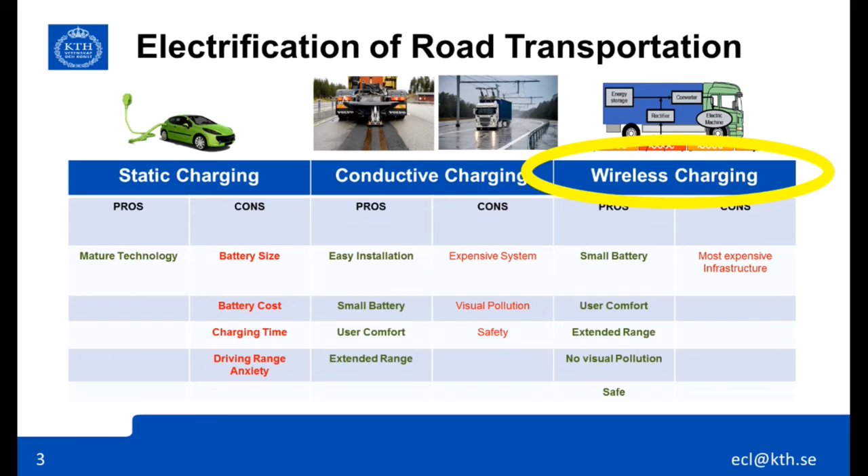So here are the pros and the cons of the different solutions. The introduction of the static solution has been really slow in the market because of the shortcomings that have been proven. So right now we're focusing on the dynamic, especially the wireless solution, because even though it's a really expensive investment, it seems like it will be the better solution. This wireless charging solution for highways, the inductive power transfer systems, is the better system because it is more powerful and more tolerant to misalignments.

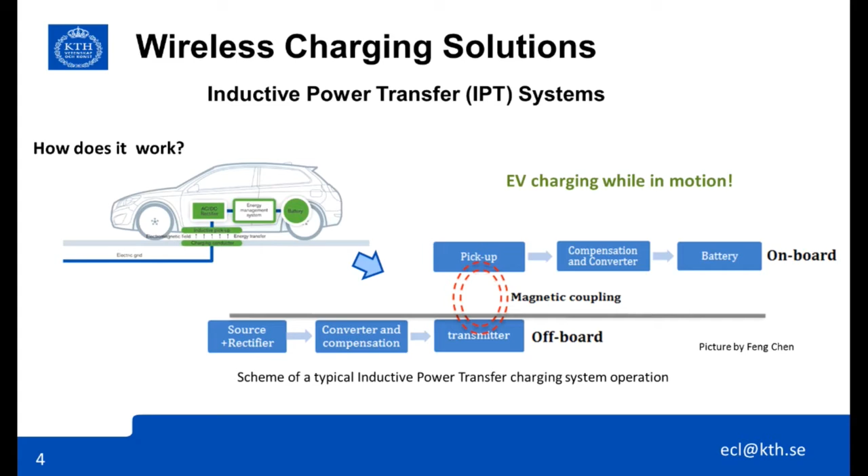And how does this work? Basically it consists of two devices: the onboard device installed in the bottom of the vehicle, and the off-board device embedded in the pavement and connected to the grid supply. Through a magnetic coupling, we can recharge the batteries of the vehicles while they are driving. And the whole implementation process is a challenge. The challenge is how to integrate this system in a feasible and sustainable way.

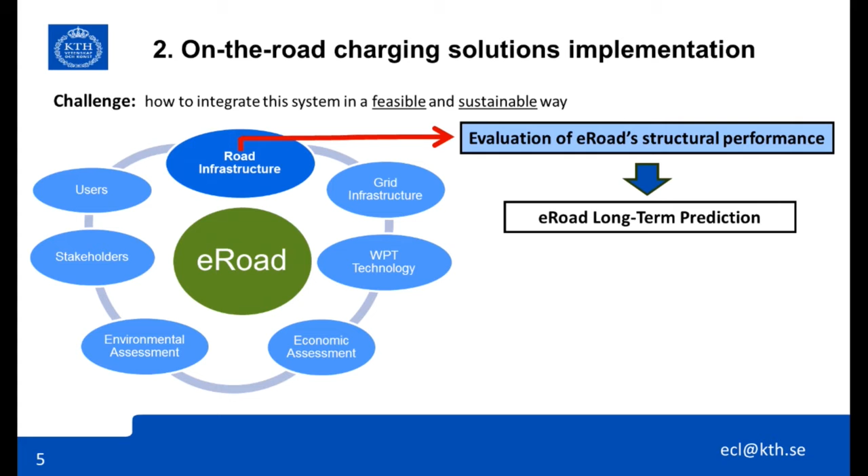These are just some of the factors involved in this process, like the requirements of the users, the different stakeholders, industry, governments, etc., the economic and environmental issues, the development and improvement of these wireless technologies, the design and construction of the grid infrastructure, and of course the development of the road infrastructure. I'm focused on the evaluation of the e-roads structural performance to get a little closer to the long-term prediction of this infrastructure.

Why the long-term prediction? Because in the whole cycle of the implementation process, the design stage will be really important due to the lack of experience in the construction of these kinds of roads. So the long-term performance, together with the social, environmental and economic issues, will lead us to the sustainable and feasible integration that I was talking about before.

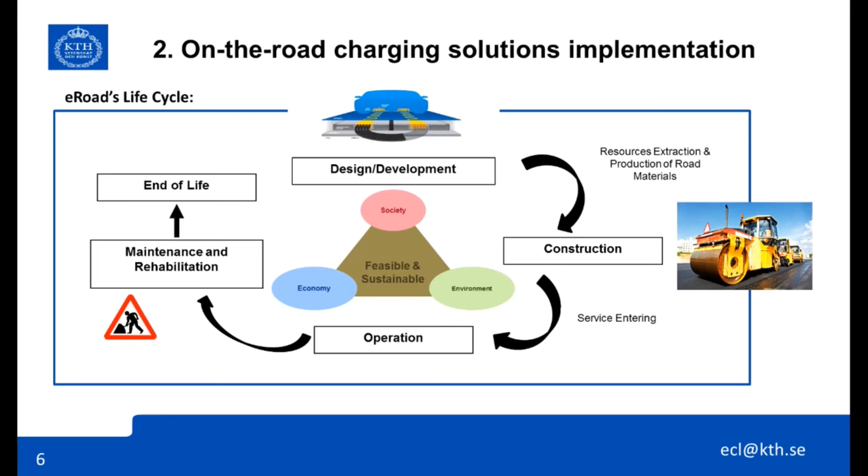So this is the framework, the big picture of my research. For the e-road structural design, to build a good solution for the future, we will characterize this structure by experimental tests, material characterization and validation, and computational modeling with different input parameters to make different configurations and try to find the best one.

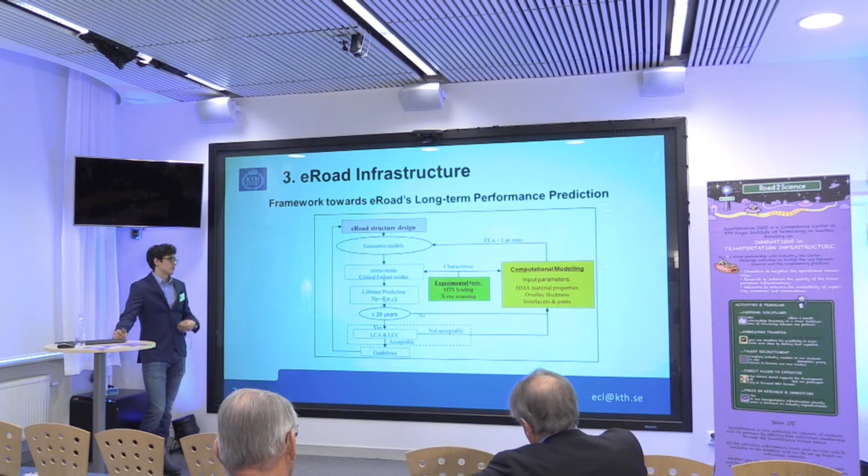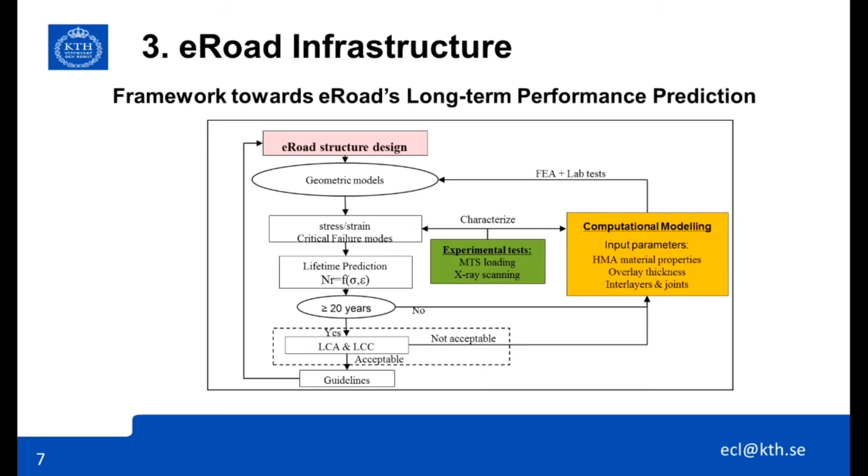We can obtain different failure criteria and modes from here, which will give us a broad estimation of the prediction of this structure. Then we can use these inputs for decision-making tools like life cycle cost analysis or life cycle assessment, and maybe write some guidelines for future construction and maintenance.

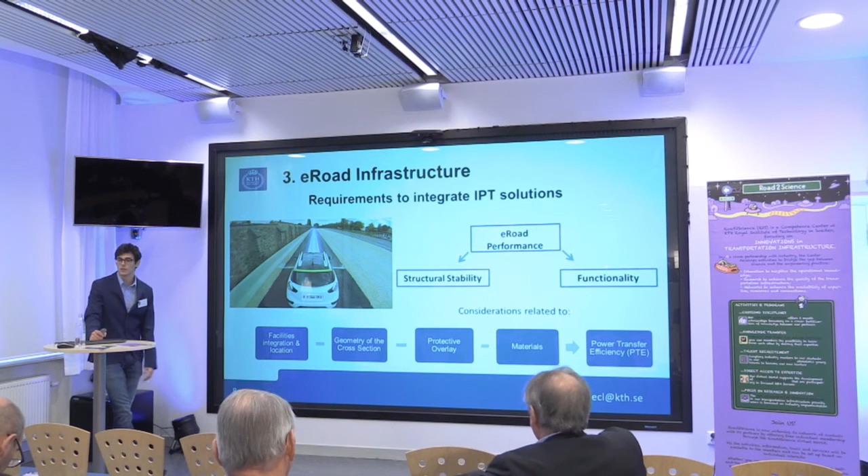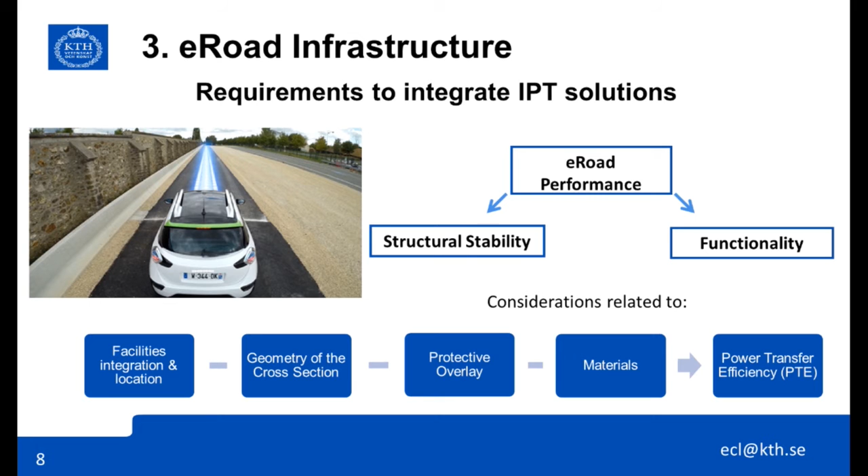Before everything, we need to know the requirements to integrate these inductive power transfer solutions in the pavement. The e-road performance is based not just on structural stability, but also on functionality. We have to combine these two issues. Some considerations are how and where to integrate these facilities, what the geometry of the pavement will be, the protective overlay, and which materials. All these considerations have to take care at the same time of the power transfer efficiency between the vehicle and the pavement.

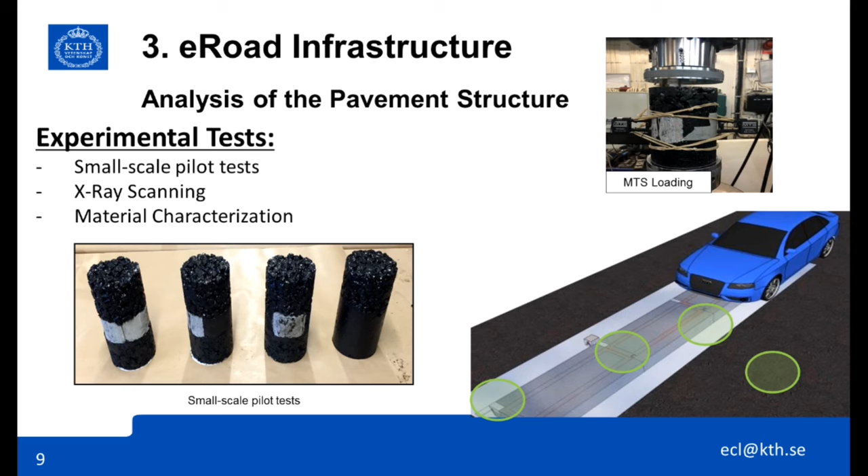Right now we have conducted some small-scale pilot tests of different locations of the e-road infrastructure. The module containing these facilities we call the charging unit, and we evaluate four different locations, like the corners, the interface with the asphalt, the area where two consecutive charging units are merged, and we compare them with a conventional pavement to see where the critical areas are.

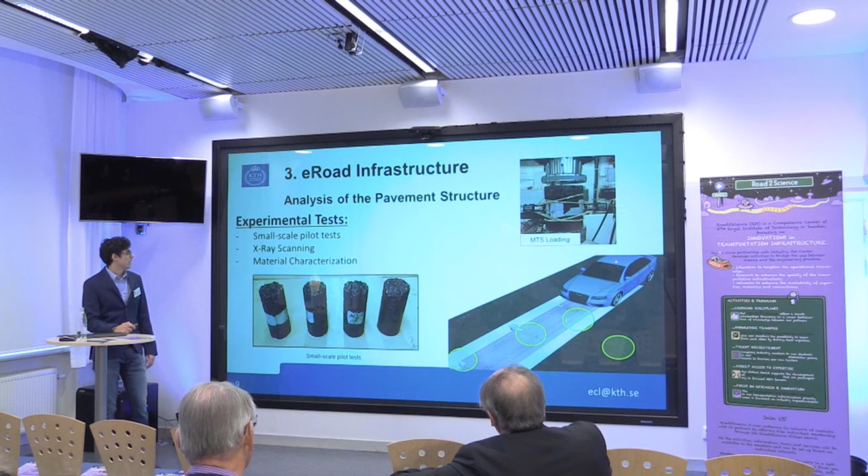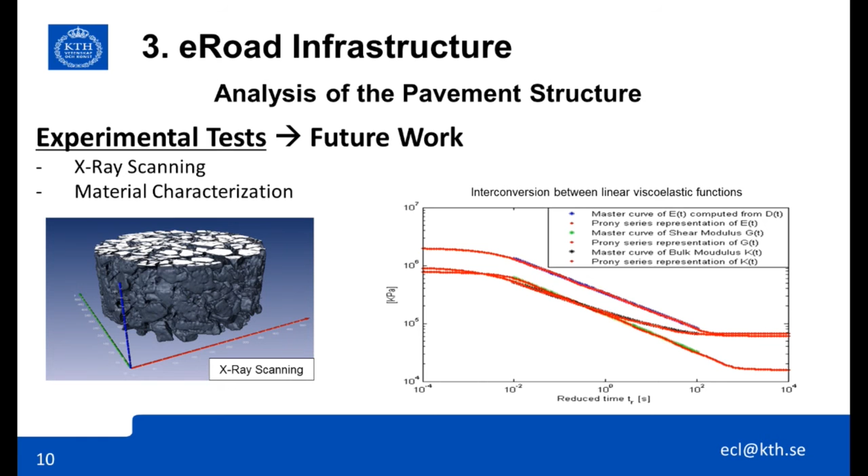For the future, we are planning to keep doing this small-scale e-road pilot test in different stages, and do X-ray scanning to evaluate the initiation and propagation of the cracks, and also material characterization to get deeper and more accurate characteristics of the materials.

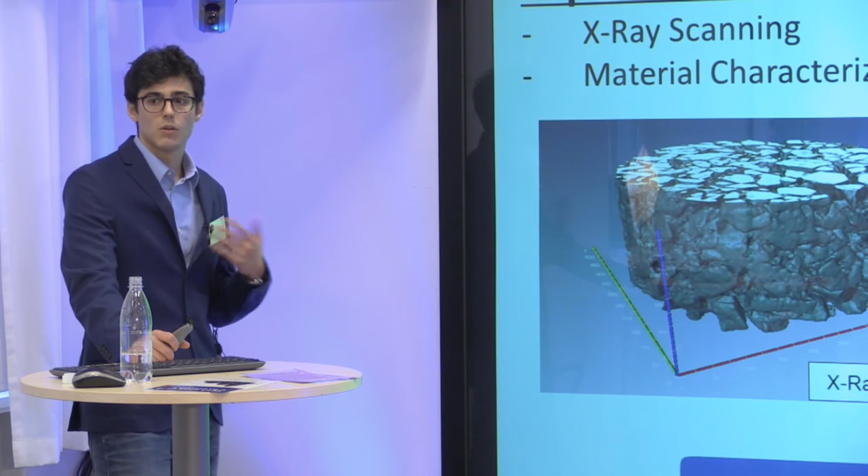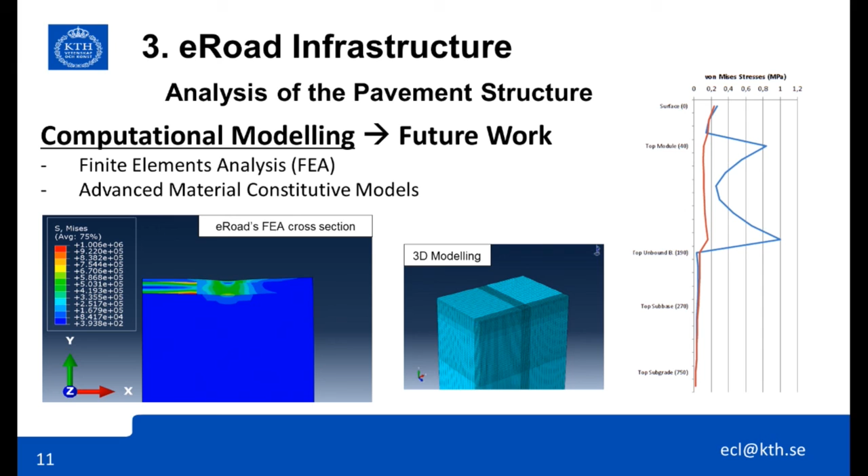As I said before, the aim is to combine all this information with computational modeling. By using finite element analysis, we can integrate this charging unit in the middle of the pavement and evaluate the behavior of the structure. And further in the future, we're planning to do more advanced material constitutive models.

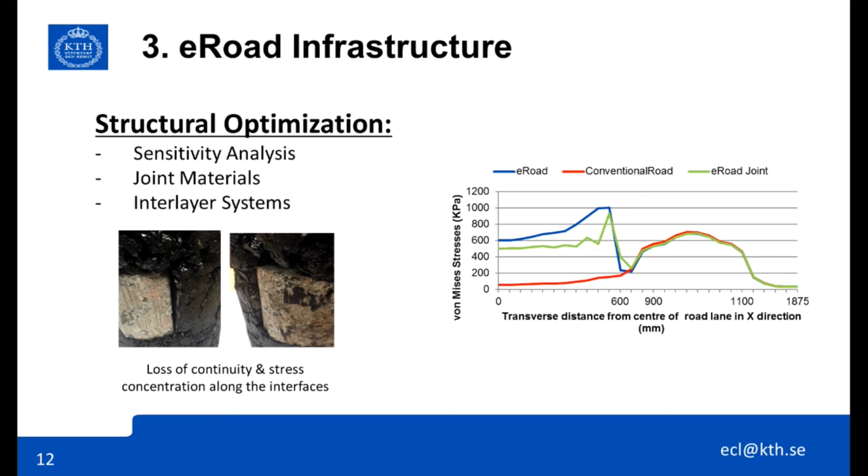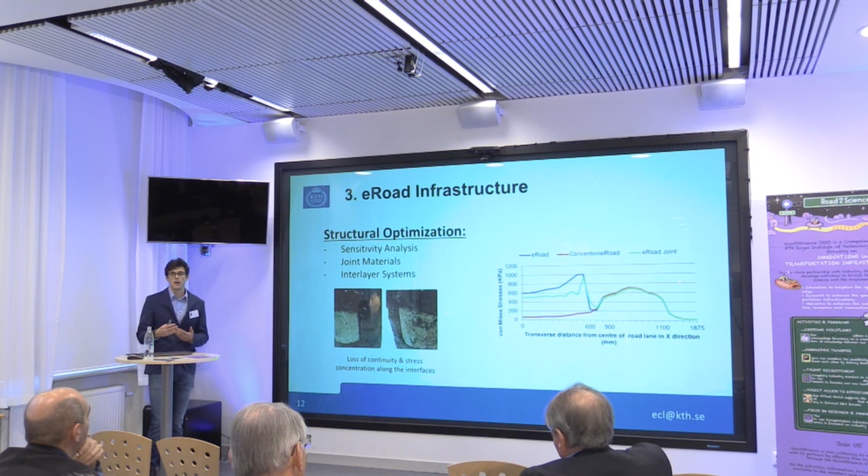So far, what we have seen in this small-scale pilot test is the loss of continuity and stress and strain concentration along the interface between the charging unit and the asphalt. So we have at least identified the critical areas that will be important for further research to get a structural optimization.

We are planning to do different sensitivity analyses to test different configurations and the influence of the different parts of the structure, and of course try some joint materials or interlayer systems to see how they react with the e-road structure.